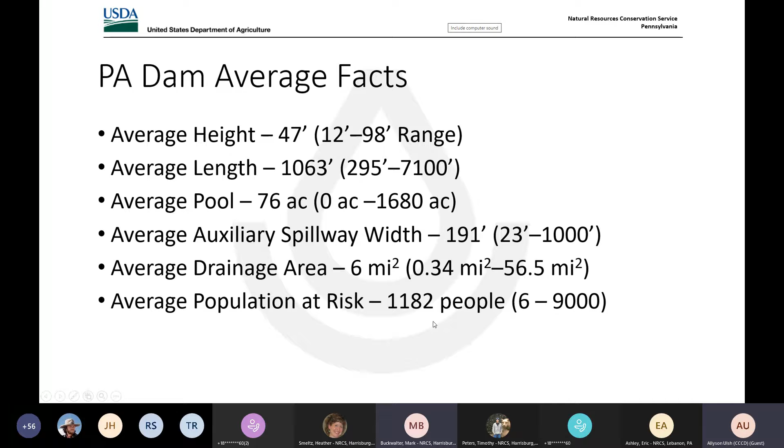Just wanted to pop this slide in here for some facts for dams in Pennsylvania that NRCS was involved with, some average heights. I'm going to read all this off: up to 98 feet high, pool area, about 6 square miles average drainage area, population at risk averaging over 1,000 people. So these are very important dams.

The dams were generally built for up to a 50 to 100-year lifespan. So if we're looking at some of those timeframes I just talked about - and I think, Heather, I pulled this from a slide deck from 2016 - every day these dams are getting older, so some of these percentages might be upped a little bit. But we're looking at some that are over 50 years. So what should we be doing as an agency?

And that's where we're getting into rehabbing and assessing some of these dams. Most of the dams in PA are aging gracefully. So why rehab?

I have a few reasons listed here: deteriorating concrete, some spalling. I know a typical ag project, if you look at our construction specs, the lifespan is noted as 25 years. But some of these harsh conditions on the risers and impact basins - we've seen very good success, but there are some minor issues at spots, some sloughing in the spillways or in the embankments. And then the big one here at the bottom: meeting current state and NRCS safety requirements. They've changed, so we need to assess these dams accordingly.

Here is a map of PA dams. We have some in the design and planning phase, so there'll likely be a lot of construction coming down the road. Like I said, we had an RCC training from Gannett Fleming that was huge, looking at the workload we have down the road.

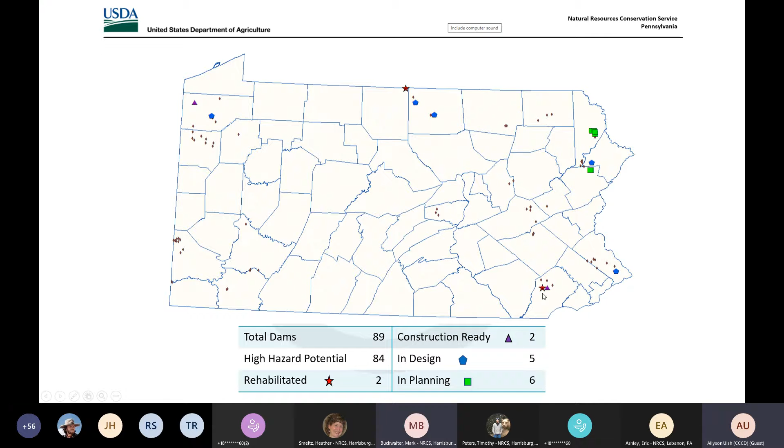Two have been rehabbed up in Potter County, North Fork, and then Hibernia, the one I was involved with, was rehabbed, and now this one here is Beaver Creek, right next to the one I worked on last year.

So talking a little bit about Beaver Creek, it's in the Brandywine watershed in Chester County. It was constructed in 1976, and it's owned by Chester County Water Resources. We partnered with them when it was built, and they still own the dam and were interested in the rehab program.

It was built for flood protection. Height of the dam's 35 feet. The length of the embankment's over 1,300 feet. Drainage area is close to 2,000 acres.

Floodwater capacity is 184 million gallons, and the water surface area was 11 acres that they're going to operate now as a dry dam. This PA 433, that's how we code PA, and then the number is how we code these dams across the state.

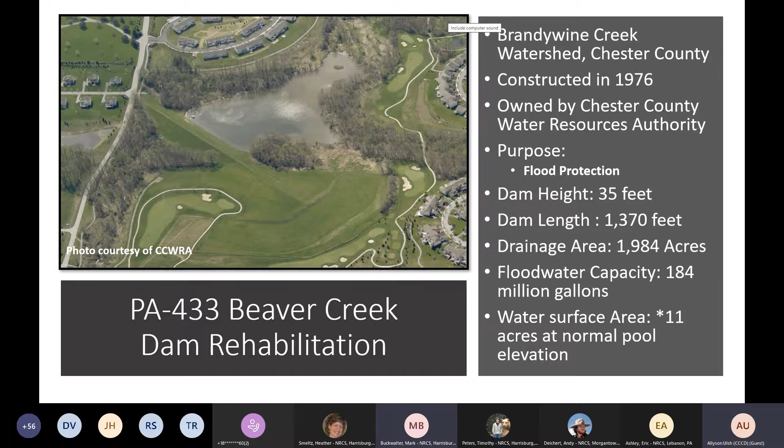The rehab benefits included flood protection, some dam safety elements, water quality, public safety with the pool area being able to make it a dry dam, wetlands benefits being able to dry it up and create naturalized wetland and wildlife habitats, and then just maintenance and safety for workers. I know getting out to that riser they had to take a boat out, so having it as a dry dam would make that a little bit easier.

The dam, once through the rehab, they assessed it again, and it protects over 4,000 residences, 8 schools, 2,500 employees, and the assessed value of all the saved property was over 300 million. So it's a very important dam out there.

The rehab components - the one I'm focusing on here is what we did in the auxiliary spillway. We armored the control section with a roller compacted concrete drop structure. So that's what I'm going to focus on here.

Some of the other elements: they lowered the crest elevation to make it hydraulically flow the design storm flows. We made drainage improvements, put a trench drain in the toe, and part of O&M and assessing these dams and interior piping is getting cameras installed in the pipes to get them viewed. A lot of the toe drain is a 12-inch pipe in the middle of the embankment. Modern cameras can maybe make it through one 90, but there were multiple 90s in this 12-inch pipe, so we did a bunch of cleanouts and access ports to be able to get a camera in and inspect a little bit better.

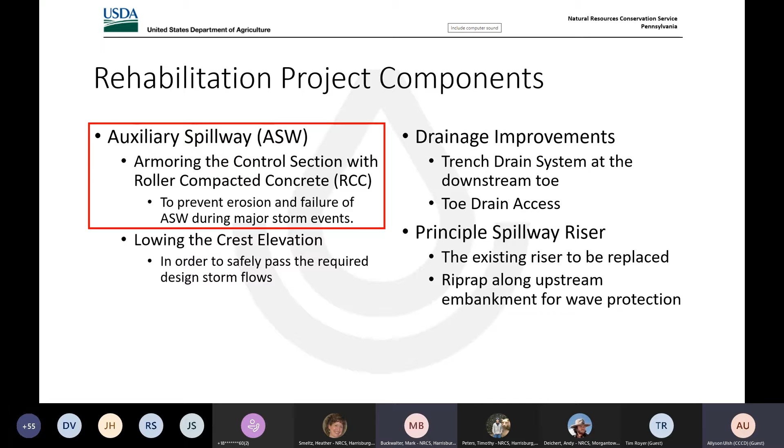A little bit about the job: the contractor selected was KC Construction, and they had a winning bid of 2.24 million. There were some contract modifications and some things we found on site, so that's definitely north of that amount right now. The engineer's estimate was 3.5, 3.6. We had 4 bids, and the next lowest was 4.3.

So we're extremely happy that we had one within our engineer's estimate and what we had budgeted. But you can also see we were very surprised at how low the low bidder was, and there are some reasons for that. The high bidder was 6.3, so I wanted to show some of those figures.

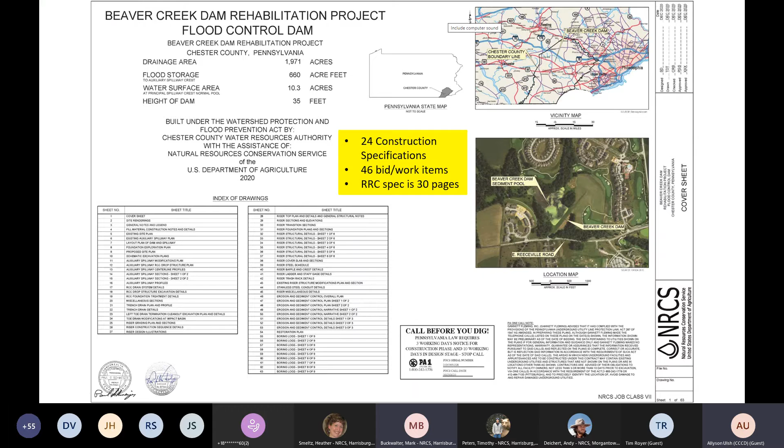Touching a little bit more on the design, there were 24 construction specs, so it was a thick construction spec binder. There are 46 bid work items, and the RCC spec itself was 30 pages. So just a lot to learn and prepare for, and that's not including all the ASTMs and testing procedures to know and understand. Adam can attest to all the studying.

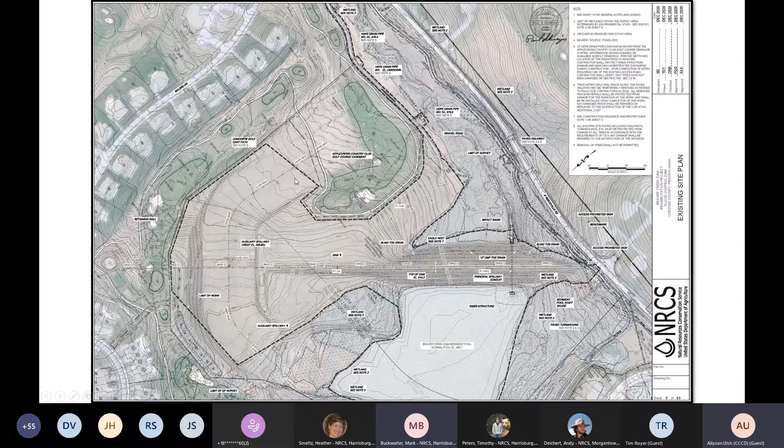Moving along, here's the existing plan view - the crest of the dam, the riser structure, and here's the auxiliary spillway. A little bit more detail: here's where we're going to be doing our work and controlling, and I'll touch on what we're doing and why. Here's the water as it would flow over heavy rain events, flowing through the spillway - you can see the spillway runs right through.

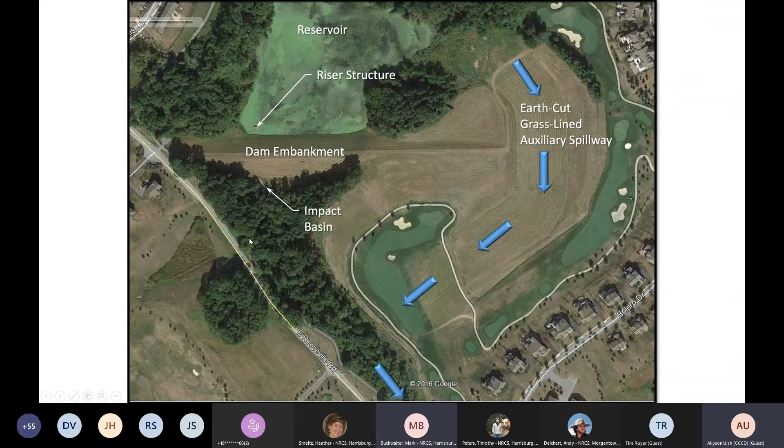I don't know if this is hole number 1, but yeah, and here's homes that had a nice view of the construction.

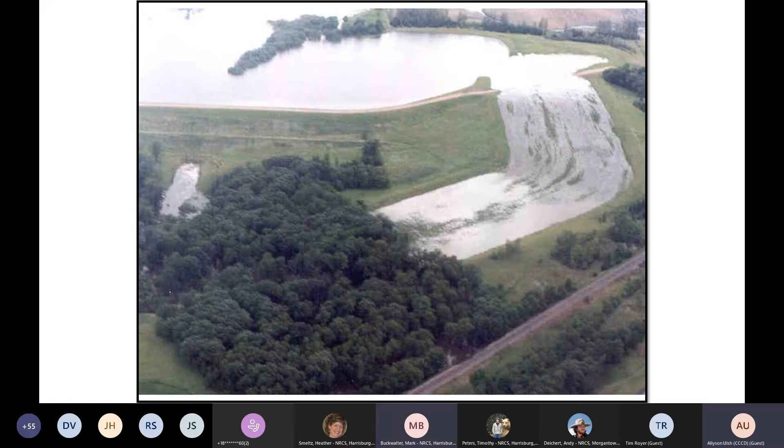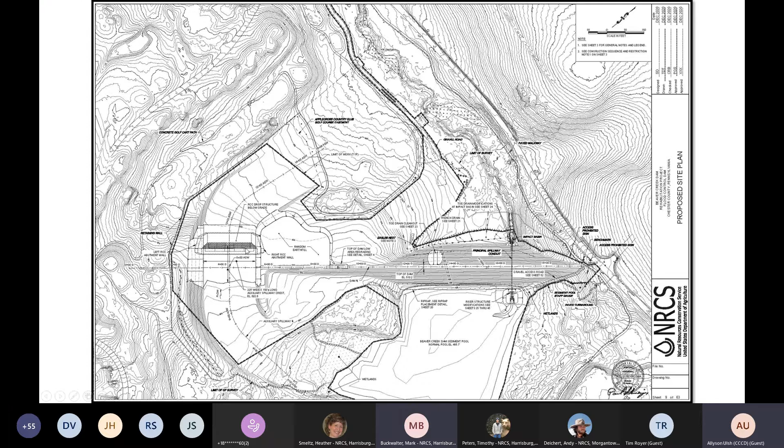So the proposed site plan is to do a drop structure, and they did geotechnical borings to see where bedrock was. What we've done is put in a roller compacted drop structure, which has a control section with a slope down into a stilling basin to dissipate flow. That's the structure we're looking at. Here's some more detail of the steps. We did perforated pipes behind the structure itself to help relieve pressure and equalize water underneath. Here's a concrete cutoff trench that was put in to control flow as well.

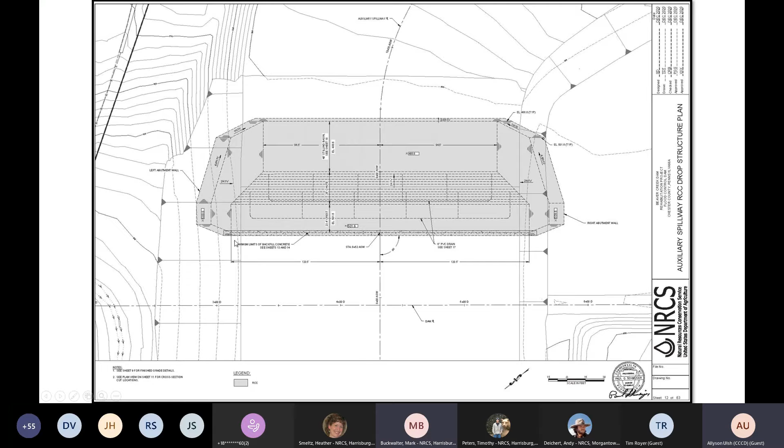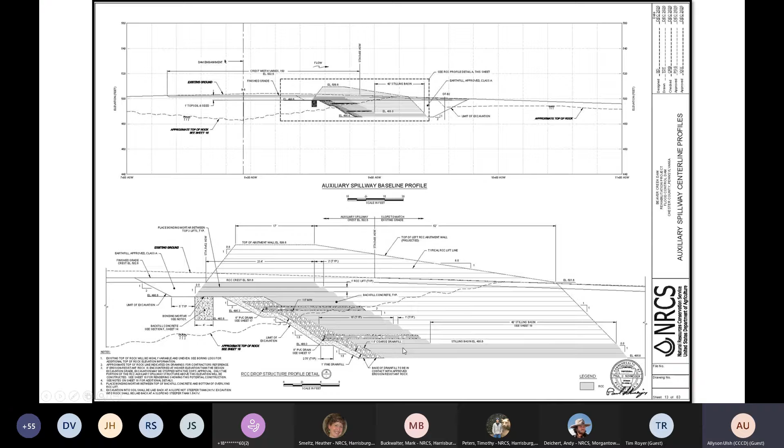Here's a cross section of the area, showing some of the bedrock where it was anticipated to be. Here's showing your 1 foot thick layers of RCC, the drainage pipe through, a sand layer, and then a coarse layer on top of that. Here's showing one of their bore logs. They created a little model here showing how this drop structure would sit in and tie into erosion-resistant rock. Here's some of their corings that they analyzed in the lab to see what kind of flows they can withstand and what would need to be removed.

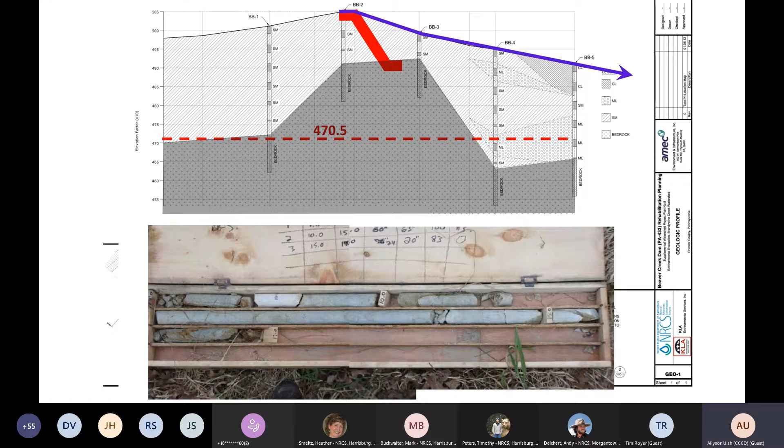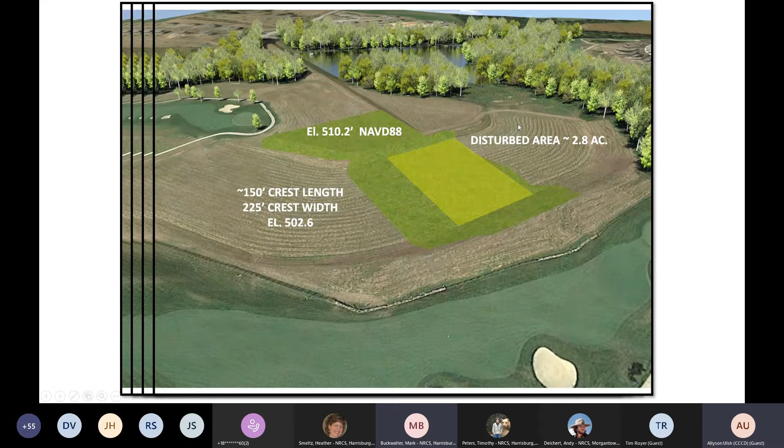Here are nice renderings that Gannett Fleming put together, showing the spillway itself as is, and here's what we're going to be doing. We're going to be excavating into the control section down to competent bedrock and build this structure back in, then cover it back up with topsoil so it's going to look like it's never there. Currently it's been seeded, we're done, it's been backfilled, and that's exactly what it looks like now. They took, I think, close to 2 feet off in the control section to have capacity through here.

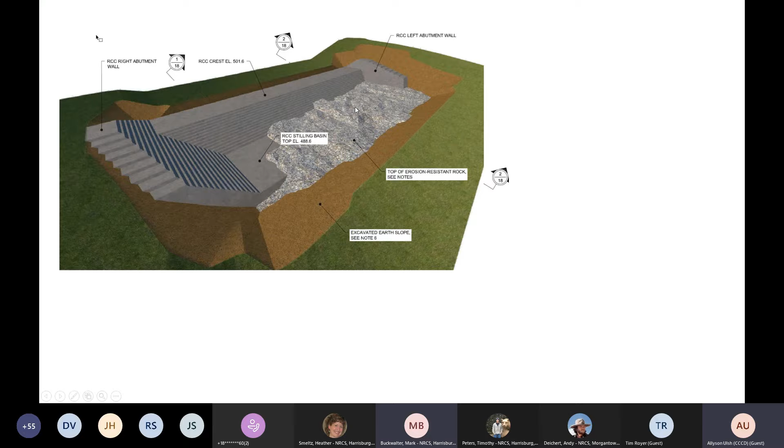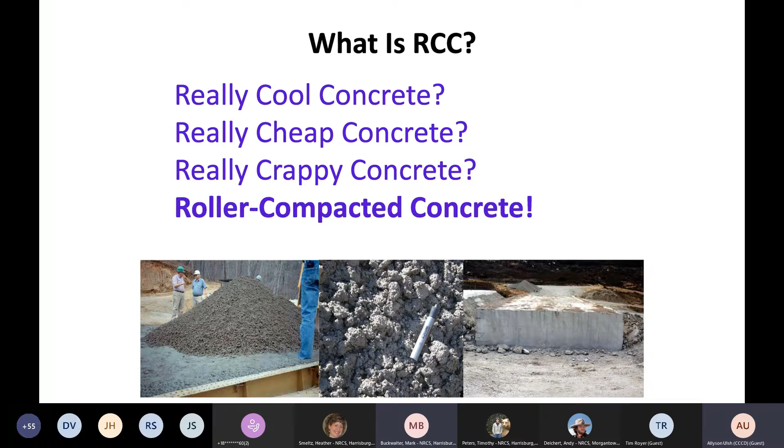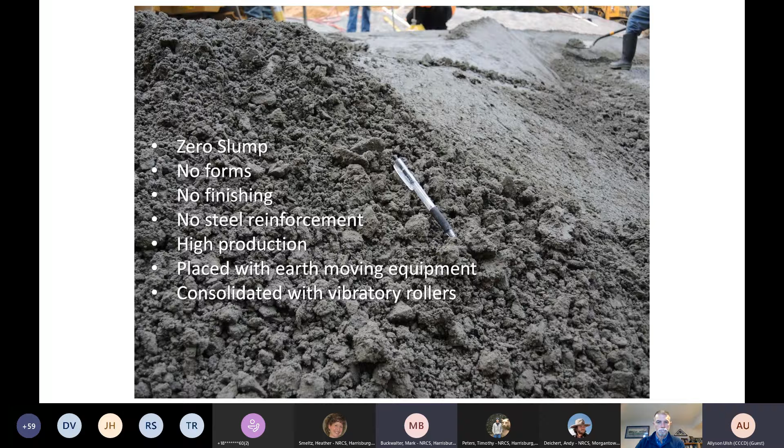I wanted to share a few slides to get into RCC and what it is - I like this slide a lot. What is RCC? Really cool concrete, really cheap concrete, really crappy concrete - that's some things you may have heard, but it's roller compacted concrete, and it's been a massive development in the dam world. Per ACI 116, RCC is concrete compacted by roller compaction, so it's concrete in an unhardened state that will support a roller while being compacted. It has zero slump, no forms, no finishing needed, no steel reinforcement, high production placed with earth moving equipment. I might have to keep moving here, I might slide through these.

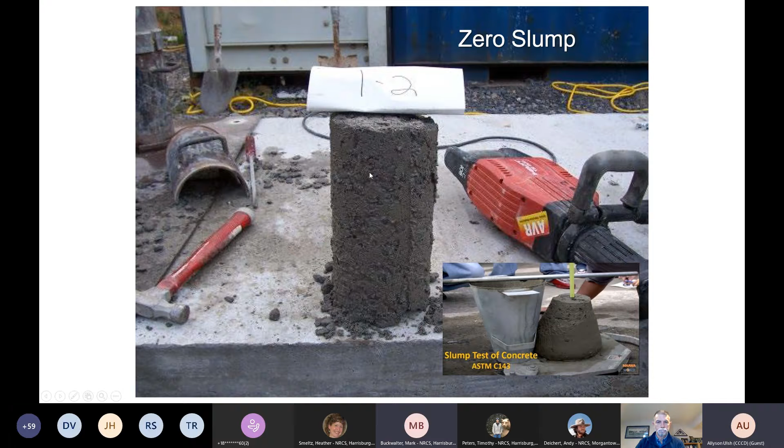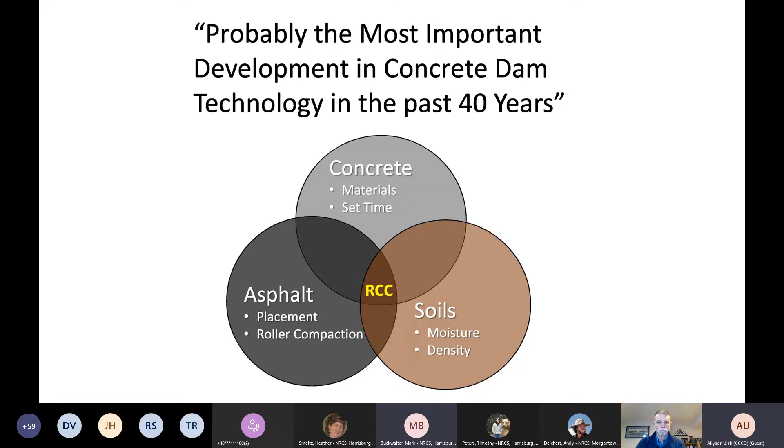Here's showing conventional concrete next to RCC, a picture - you kind of see the difference. You can attempt to form it as best you can, but it doesn't look quite as nice. That's why, pretty often, a lot of these rehabs we are covering with topsoil, which is sacrificial. It will wash away if flow does go through the spillway, and that's a known thing, known by the dam owner, that would have to be put back if it does flow.

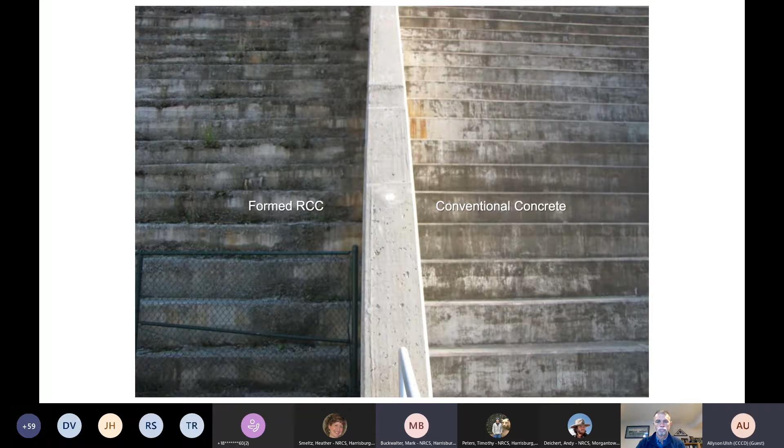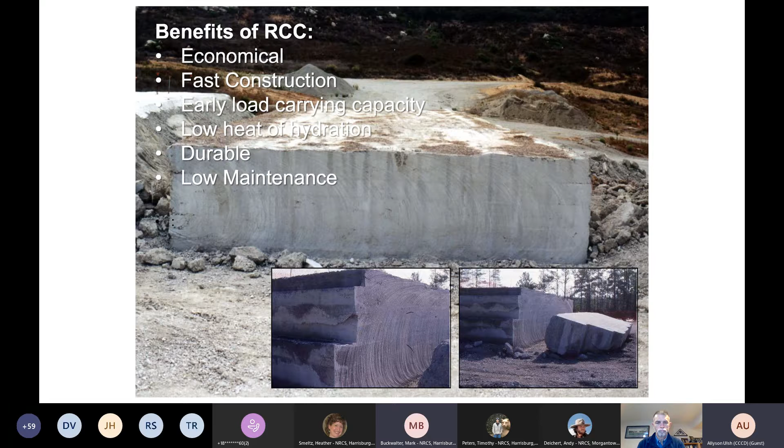The spec for RCC was 3,000 PSI at 28 days, so that's what we required and wanted to see. We were getting cylinder break results at 7 days on the mix they used at over 4,000 pounds average. In my opinion, it looked like they had a lot of cement in this mix.

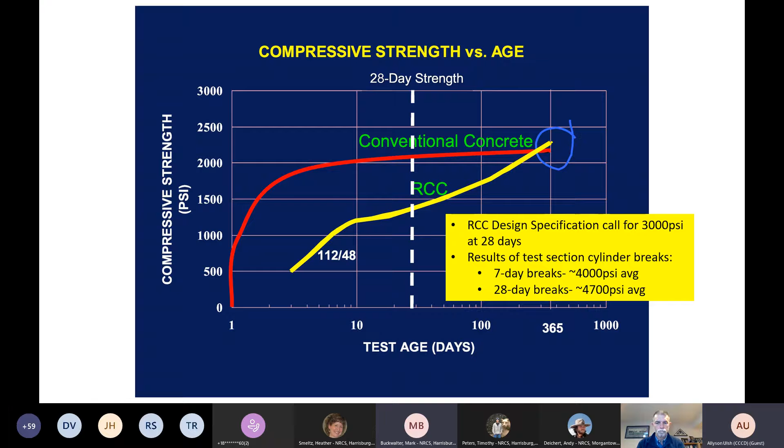It had a lot of early strength as far as these results go. The mix is very typical to your typical RCC or concrete, your Portland cement and water mixtures, so it's very similar to concrete, just different proportions. Coarse aggregate was 57 stone, the fine was concrete sand, and they used a pre-mixed cement slag mix that was 75% cement and 25% slag.

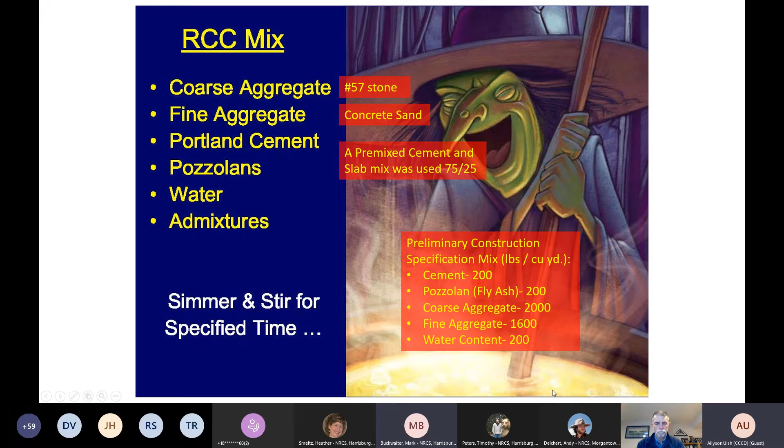These are a preliminary mix we had in our spec of what they typically have in RCC mix. So, jump into the project.

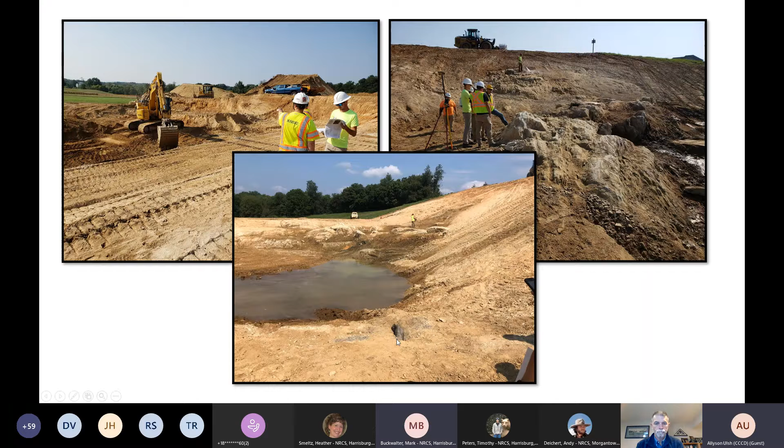This is actually a tile drain that we found. It wasn't in the rehab drawings, but it was in the as-built. But there was lots of seep, lots of water they had to deal with to get pumped out, and that was a significant element to the rehab - a lot of work went into dewatering the site.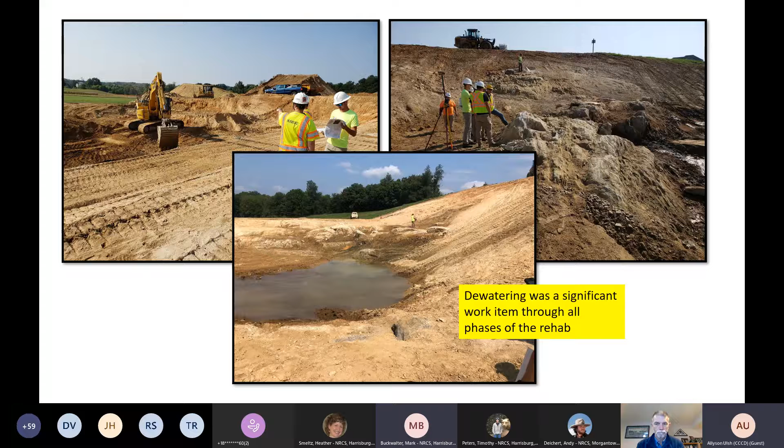Here are some sumps they put in, and continuously, 24 hours a day for 2 months, they had generators and pumps running out there. Here they're digging, and they were doing quality control and getting the survey limits they needed. This is showing some of the water.

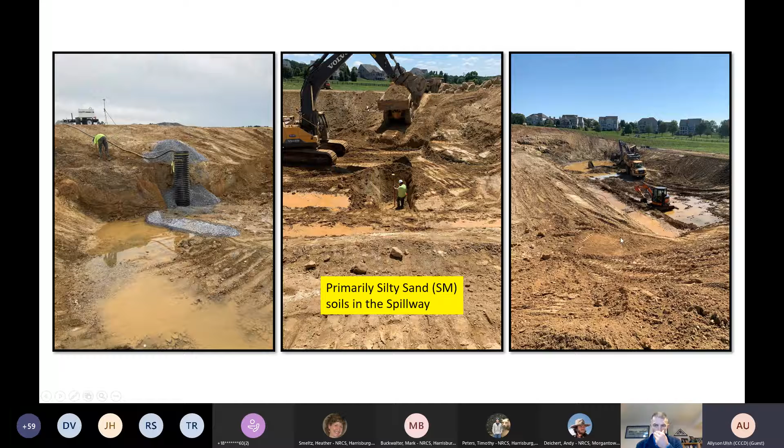Here you can kind of see these banks being shaped as they go. Here's showing about down the grade. I wanted to touch a little bit about this detail.

We weren't completely confident - they did a lot of borings, but we weren't confident exactly where they'd hit bedrock based on a lot of these illustrations. On this right side, we never hit bedrock. We dug a lot further, and the contractor said, how far do you want us to dig? We could just keep digging.

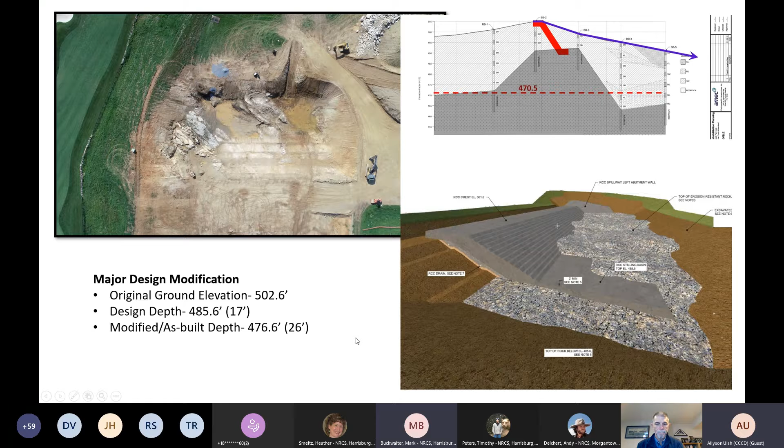We did some analysis to determine how far down we needed to go based on the stream elevation at the outlet - we wanted to be below that. So if this thing did start flowing and eroding back, we'd be at a depth that it wouldn't chew out underneath the RCC. We added about 9 feet of extra excavation, a big modification to that process.

Here's showing the detail of that change. We stepped it down a lot further, thickened the stilling basin, and took it to a lower elevation.

Tropical Storm Ida - it seemed like it was a challenge to get this rock cleaned. It seemed like they'd get it cleaned, and every weekend it would rain, and they'd come in Monday, and the laborers were very distraught to see what they had to come back to and keep doing what they just did. Ida dropped almost 7 inches in 8 hours.

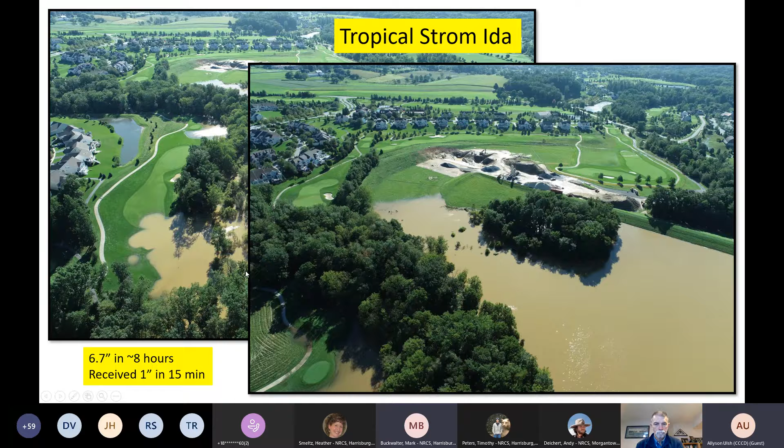In a 15-minute span, it dropped an inch. This is the highest the water ever got at Beaver Creek, and you can see how close it got to the work they were doing.

Keep moving along here, I'm sure I'm probably pushing it already. Here's the tower, here's the batch plant, here's where they mix their RCC.

They had 2 volumetric trucks, 2 silos that held about 50 tons each, and a 50-foot conveyor that would fill these dump trucks with sand and gravel.

They were noting that at peak production, they could do about 120 cubic yards per hour. That's 2 trucks producing 1 cubic yard per minute. So pretty heavy, pretty awesome product, quick production, quick placement. You can imagine doing that much of conventional concrete.

Normal production, I think they ended up working more at this rate, if not less, 80 cubic yards per hour, because there were a lot of components. They were backfilling as they went and doing a lot of other elements as they went.

Here's a quick schematic of these volumetric trucks they would use. This is partially why they were able to bid so much lower.

We specify in the specs a pug mill setup where they'd have their slag or fly ash separate, and they'd mix everything on site. They would have this mixed concrete come in, it would dump in, and then they'd have a truck running for this, which would be the 57 stone and the sand, and they'd be filling this.

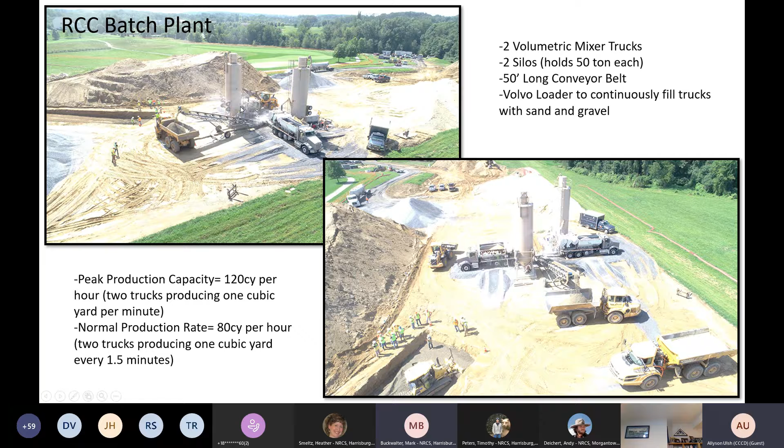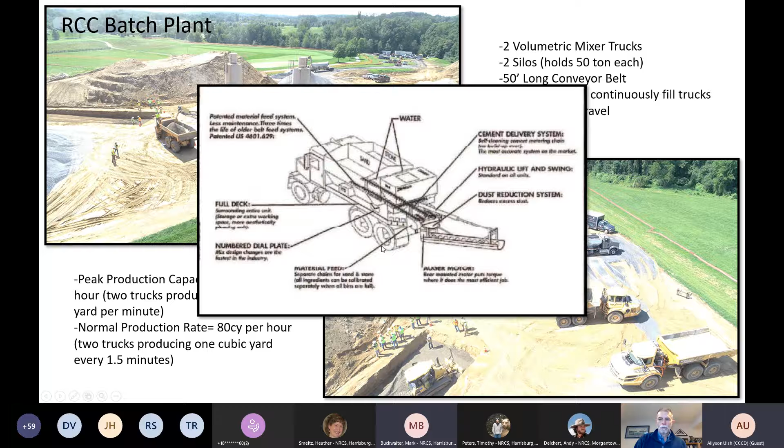They'd have this Volvo loader running nonstop, filling each truck up with sand and gravel, and it would conveyor mix with water. It didn't take much in the trucks where it mixed everything and came out the end, and it was a very well mixed product. I was very impressed. Here's some close-ups of the process.

There was a test section. That was a bid item to do a test section, and here's a cool apparatus specific to RCC. This is a Vebe test. I would consider it similar to a slump test for concrete.

Basically, this would shake it, and they'd have this weighted thing on top, and it would shake it, and then you time it until the paste kind of started easing up, and you could see the paste on top of this little ring. And that gave a good test on where the water content should be.

And here's Gannett. They helped us with the test section to make sure we had the properties we needed to move forward. I mentioned that it has soil characteristics, so when you do soil earth fill, you do compaction density testing. So we use the nuke gauge to run it for this RCC.

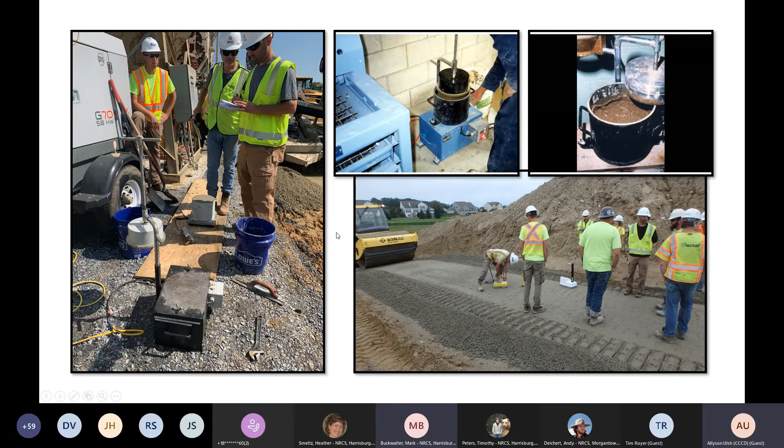Pete, I think you're on the call. This is people might recognize him.

Here's how you do cylinders with RCC. You wouldn't use a rod. You use this called a Hilti hammer with a round plate, and you needed a shell around the plastic cylinder so it wouldn't bust as you compacted it. So you'd still do 3-inch lifts, 3 lifts in this thing.

And here he is, Pete broke our brand new Hilti hammer on the second cylinder. Thanks, Mark. Thanks. Yeah, Pete, of course.

And actually, we had an issue with the first test. It was coming out a lot. The first test section, we actually did 2 days of testing. It was a lot drier, and I think, Pete, that's kind of why we were really pushing in the same concept. You vibrate until you see the paste kind of coming out around this thing, and the paste wasn't really showing it, so we were really pushing and compacting. So I think it's not all your fault, Pete.

Reason for the test section, it's really for the contractor to show means and methods and everyone to get on the same page: how they would place it, how they'll roll it, how many times they need to roll it.

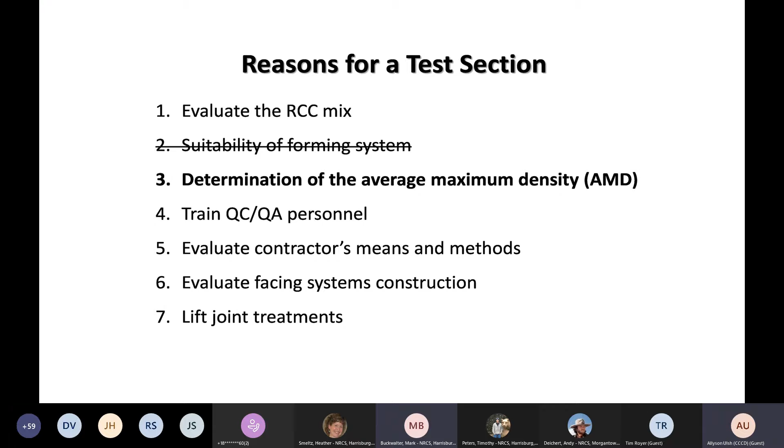I know I'm going quick, but matter of time, I'm just going to keep rolling through here.

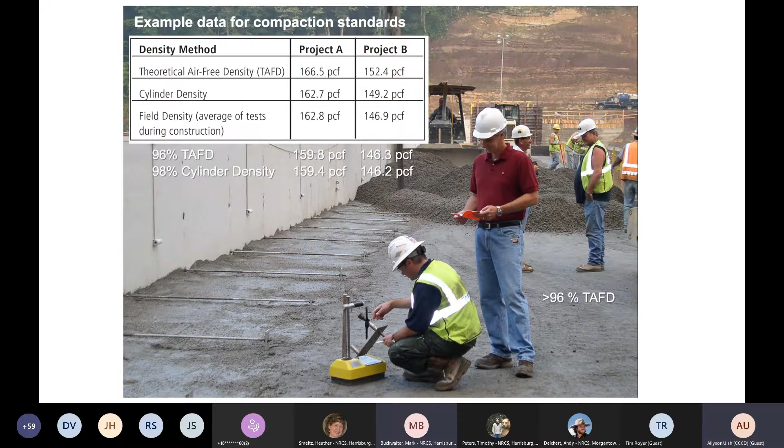So there are parameters to get to for what we needed and what nuke gauge parameters we needed to meet. You had this theoretical air-free density that you need to be 96% of that. So the nuke gauge reading needed to be right around 150 dry density.

And here's a wet density moisture curve that they ran. So they were getting around 5% moisture content, and you could see they would be within the needed parameters with that. You can see optimum's up at 8, but the contractor, that's getting pretty wet.

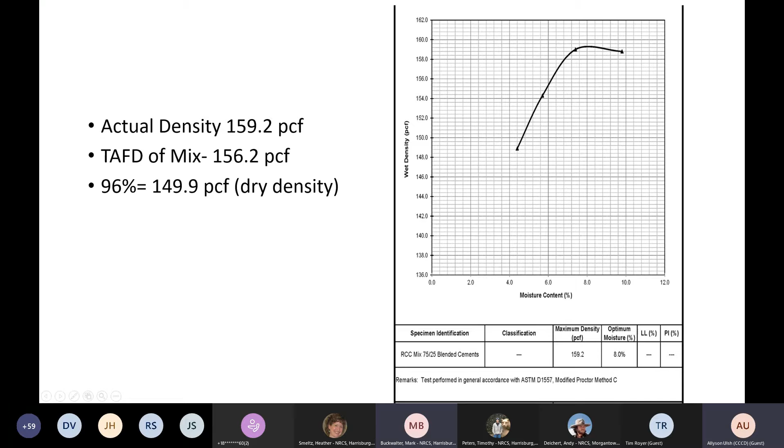They prefer it more on the dry side, more in the 5 to 6%ge, where we could have gotten probably a lot more compaction if they had it a little bit wetter. But we were happy with where they're at with 5 to 6%.

But we were telling them it's temporary, it has to happen. And then before RCC was placed, they used backfill concrete to fill in any of the fractures, any of the voids to get a smooth surface to do the RCC.

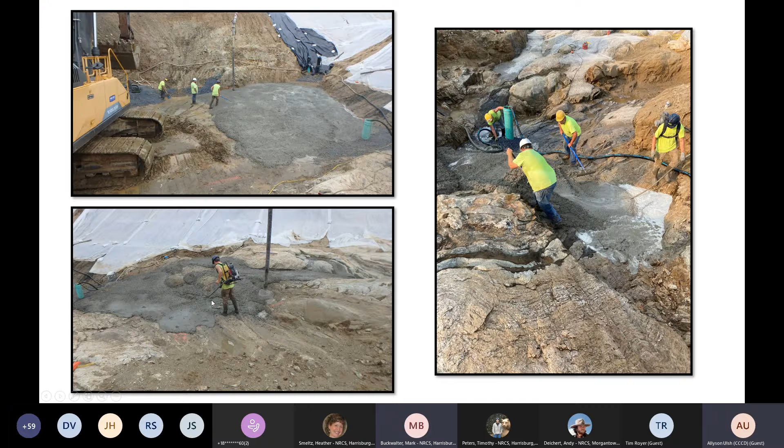So here's the crew doing that, and he was vibrating that a little bit. Nothing was formed, no rebar, just kind of setting themselves up for RCC.

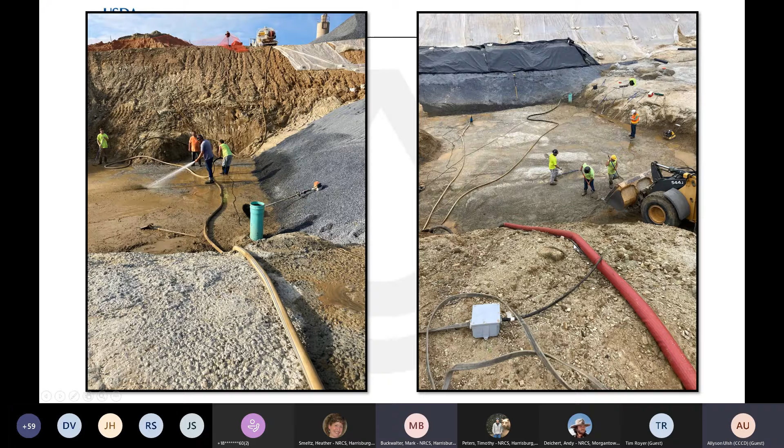Here's right before they started, cleaning mud off, and then a component for RCCs, you always needed a bonding mortar put down on all the rock surfaces, all the backfill concrete. That was basically the RCC mix without the coarse aggregates, without the 57 stones. So that was pretty liquidy, and they'd come down and scoop that out and place that ahead of RCC.

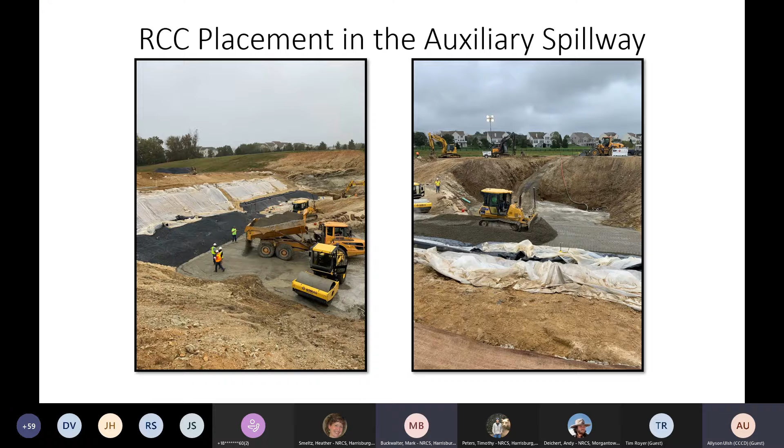Here's production with the dump trucks. Here's pushing it. There were 1-foot lifts. They put it in probably 13 to 14 inches before compacted down to the 12 inches.

Here's a montage of different photos showing the process. The sump pumps, actually, the pipes stayed in. So once they got up to a certain elevation, they just grouted them shut. You can see that there. Some of the testing, some QA, measuring the lift thickness. You can see kind of how consistency it looks like.

We were pertinent to make sure these tracks were not - so anything that was already rolled and compacted, we didn't want the tracks of the roller to go over them, so here they are protecting that.

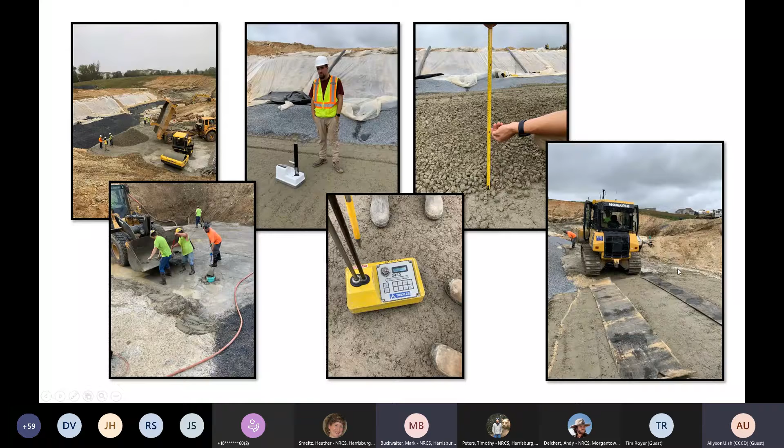Some of the drain pipes early on, they started forming it. I think they stopped doing that, so they did use conventional concrete around the pipes so they had to kind of wait for that to cure till they could get back in and start rolling RCC above it.

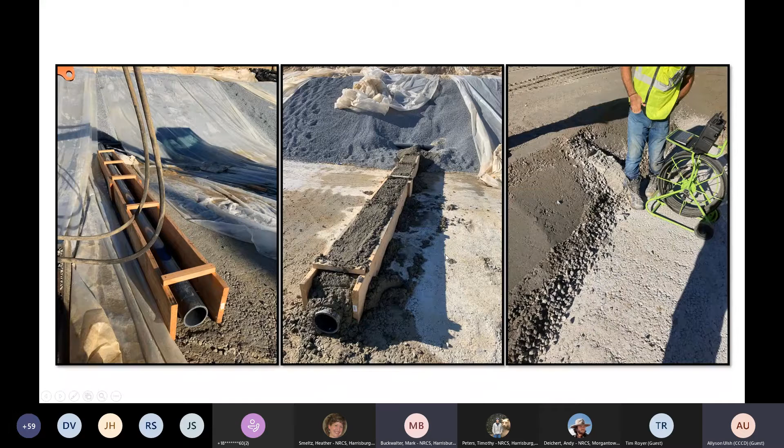Here they're videoing the drain pipe to make sure. We wanted that to be done to show that there were no issues or no collapse of pipe after the fact. Here they are doing earth fill.

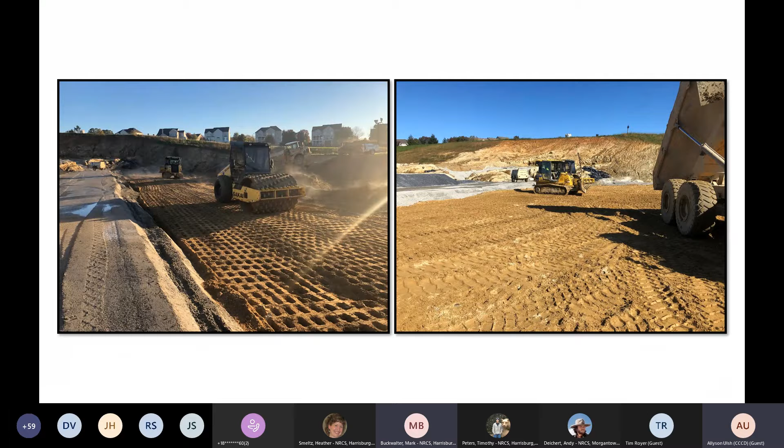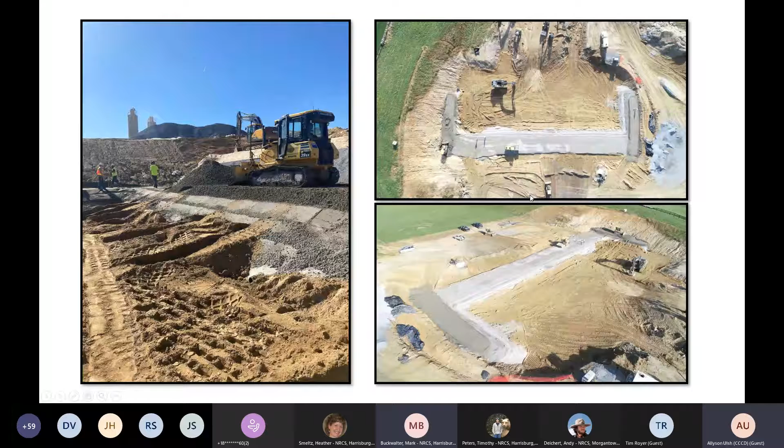As they went here, the picture of the earth fill. Here they are, these lifts coming up. You can start seeing this horseshoe being made. So in hindsight, it would have been nice to see the project done without being earth filled, but it made sense. This enabled them to keep having access to dump more and to keep the project rolling.

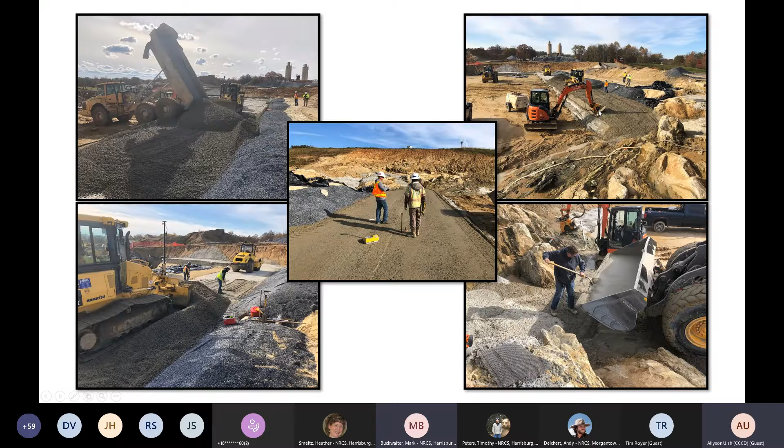Here they are. Here he is facing that slope. They run through with the compaction plate on their Kubota. Here they are with some more bonding mortar. And here we are. This is what it looks like now, backfilled, complete.

Let's see. I'm over time, Heather. I'll wrap it up here quick.

So it took about a month to do. Early on, talks were of this project - it's going to take 2 weeks, no issues, we'll get in and knock this thing out in 2 weeks. The economy really hit hard on this project. They just couldn't get truckers. The product was at the plant, they just couldn't get truckers to deliver it. So they could get so much a week. There's some weeks they got 2 loads, which would fill 1 tower, and they would do bits and pieces at a time. So it got really frustrating.

The economy even affected piping. They had to submit different pipe. Nothing was really getting manufactured, everything was delayed. Here's a breakdown on quantities: about 4,500 cubic yards of RCC was placed, 300 yards of backfill concrete, coarse and fine, about over 22,000 cubic yards of excavation from the spillway, and then the earth fill that went back in.

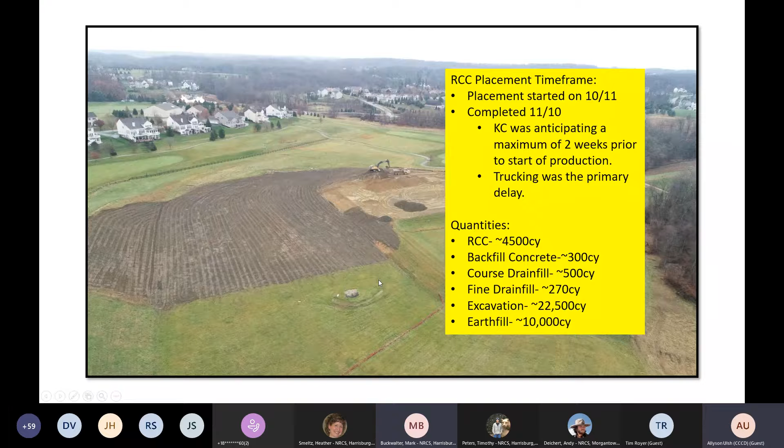Lesson learned for me, that's the title of the talk. Man, everything in the world is new to me, but RCC was eye-opening and there was a lot to learn, a lot to study. The spec was very specific.

The economy was a huge impact, like I said. The dewatering was intensive, it took a lot of time to do. The rock surface preparation was a huge process and very demoralizing, I'm sure, for the laborers and crew to have it buttoned up on a Friday, think they're going forward, and come out and have to do a lot of things again. The big element was a bald eagle was in this tree, right smack dab in the middle, and that limited our construction window from August to December 31st. So really they have two weeks now to get all the big equipment work done.

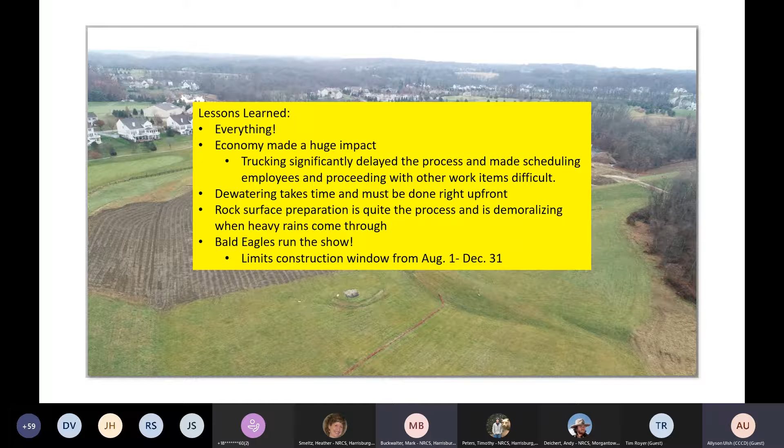And so that's what I had. Heather or Adam, you can chime in.

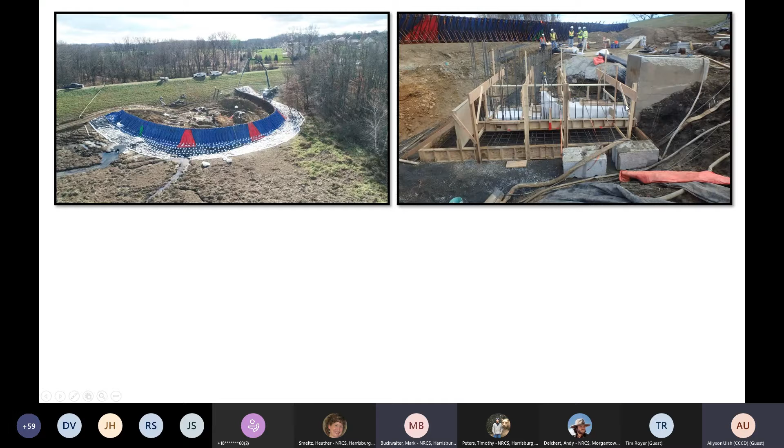This is actually pictures of the riser work that's happening as we speak. They had a coffer dam up to divert any higher flows. I'm not sure the coffer dam was really needed — I don't know that we had any storms since it's been in that were too significant, but the water is being diverted. Here's the base of the riser. Here's a foam transition, which was pretty unique that they put in. And this is where we're at now — they're actually going to pour the lid tomorrow. But here's this riser structure going along.

It's cold weather, but we've had some decent stretches. I feel like they've poured when there were good curing windows. So yeah, questions, comments? Adam, Heather, any comments to add?

The only thing I can say, Mark, is that you gave a really nice presentation. If it sparked anyone's interest, we should have another one coming under construction this year, probably the one after that, and one a year at least for the next couple of years. So we're always looking for inspection, we're looking for engineering support on them. It can be a good experience, and these are really good projects.

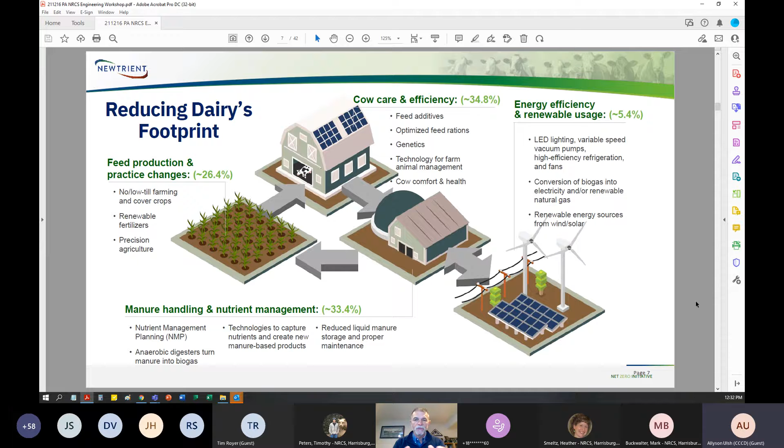In a dairy, almost everything comes in at the consistency of the sludge that you create in a wastewater treatment plant. So I always tell people that we are like the back end of a wastewater treatment plant, because we don't have to deal with as much water, but we have to deal with a lot more concentrated product.

So as we look at the opportunities, one of the big opportunities right now is biogas production and renewable energy production. I want to share some of the reasons for that and how some of those markets have developed and what's going on in them, so that we can have conversations around the important issues as you're communicating to farms and farmers, so you can help them understand if they're asking you questions.

I want to preface this with, I'm not trying to make you an expert, and I understand you're going to get questions, but I'm happy to take questions from dairy producers. So if you ever have an opportunity where somebody's saying, hey, have you heard anything about this, feel free to send them my way, because they really are the people that fund Newtrient. I work for the dairy producers, and I'm happy to work with producers of any size, really anywhere in the United States, to have conversations around what they can do, what kind of conversations they should have, and really where their opportunities are.

So as we talk about biogas, the U.S. dairy industry is a powerful environmental solution. We can provide solutions, reduce our own emissions, but also help offset other emissions. As we look at the environmental benefits of dairy, we see real opportunities, and if there are sustainable long-term markets, there are ways to pay for those benefits that actually help society reduce the overall greenhouse gas footprint.

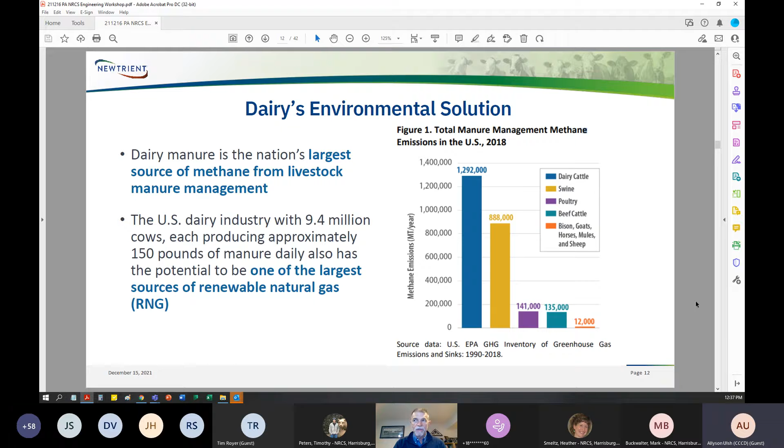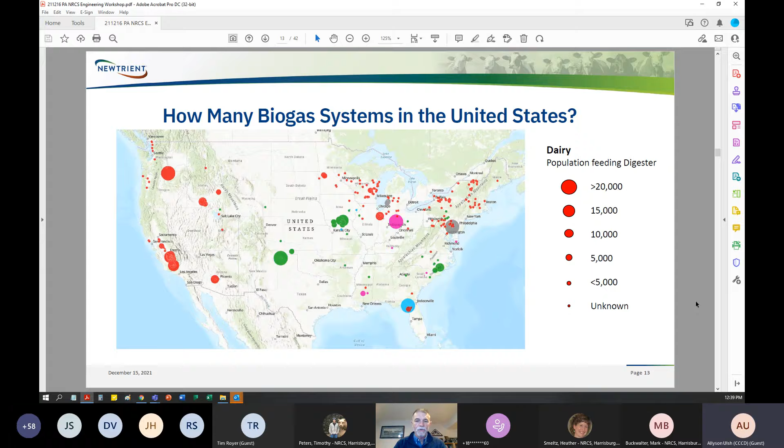Interestingly enough, there's a bunch of really small ones up in Vermont, because that's where the best market is for renewable electricity. They have a program called the Cow Power Program that sells electricity from small dairy digesters at about 22 cents a kilowatt hour, and the bigger ones at 18 cents a kilowatt hour. That becomes a market that supports those generation projects up in Vermont. So on a per capita, or per cow number basis, Vermont probably still leads the United States in the percentage of digesters per number of cows.

A really interesting thing that showed up - and this is just a logic exercise because it's not practical to do right now, it's not affordable - is that if you could take every dairy with more than 50 cows, and capture all of that through anaerobic digestion and convert it to energy, both renewable electricity and renewable natural gas, the dairy industry could produce enough renewable natural gas to supply 100% of the processors' needs and 80% of the electricity. With a little bit of food waste added in, we could probably take care of the transportation sector and the retail portion as well.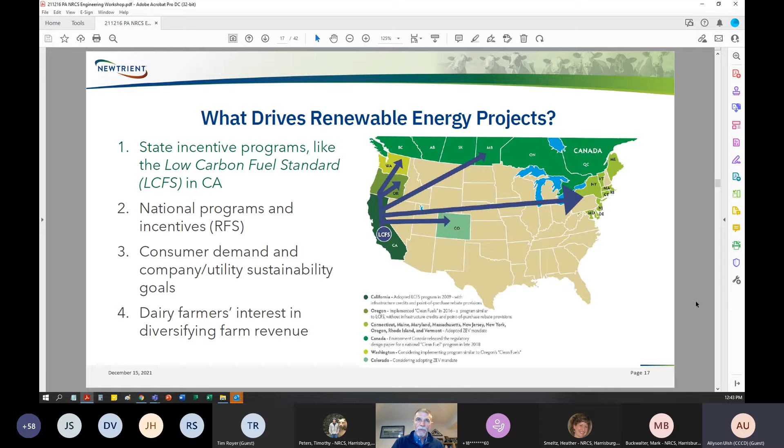As we go on, another thing is that there are a lot of companies, both in the dairy supply chain and outside of it, that are setting aggressive carbon reduction goals. Many companies, for instance those in the EU, are being driven by requirements in their country, but some are simply driven by their investors. So we see a dramatic increase in companies looking for renewable energy or renewable credits, carbon reductions they can tie to their supply chain. That's one of the things dairy is trying to offer its customers now.

Now, one of the things that's somewhat difficult is customers coming in saying, well, we want our milk to be low carbon. But if the milk is low carbon, that means we can't sell the carbon credits, because when you sell a carbon credit, you're sending the credit for being low carbon to whoever you sell it to. If those customers in the supply chain aren't willing to buy those credits, there's no way to support these projects. So right now we're in a bit of a dilemma: if we want to support projects that are good from an environmental standpoint, we often have to go outside the supply chain to realize the revenue that supports them. That's something the industry is working with right now, and something we're really trying to come to grips with and make people aware of.

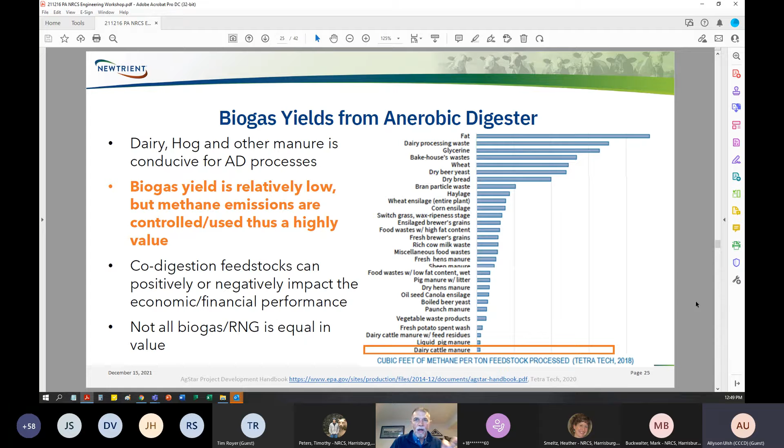And that other opportunity is the reduction of the methane from the lagoon, and also the offsetting of the transportation fuel. And this is where the carbon intensity score and the low carbon fuels standard comes in.

This is a California incentive program that produces a credit. The credit is based on what they call a carbon intensity score. And so it is looking at how much you reduce the greenhouse gas impact on the environment as a whole project. And in the lower left-hand corner of the slide that's on your screen, you can see a conceptualized CI calculation. And I say conceptualized because this is at such a high level that it's almost useless for anything but a way to wrap your head around how the calculation works, because it's multiple pages of data that have to be analyzed to get you to a CI score.

But essentially what it does is it looks at a farm where a project's going to be put, or any project for that matter, and it says, what are the current emissions from everything involved in that operation that will now have a renewable energy project? And then from that, it says, what emissions are we going to eliminate? So what emissions from the farm are going to go away? And so from that baseline that's 0, for example, reducing farm emissions is going to be a negative number.

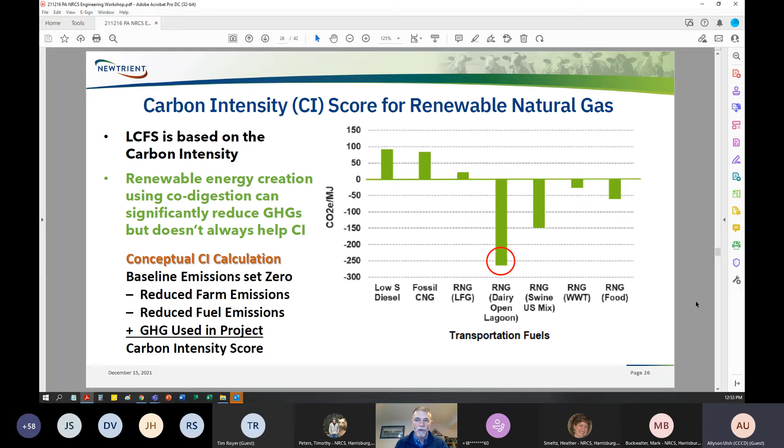If there were a way to get a solar heating system to produce the heat for the digester, that would be another reduction. So there's all these different opportunities and all these different companies looking for ways to lower the CI score and therefore increase the value of the renewable natural gas.

So what does that mean? What does that mean to a project? Well, natural gas is sold by 1 million BTUs. 1 million BTUs is a standard unit, sometimes called a decatherm, a standard unit of sale. And I based all of these numbers on Monday's markets.

Right now, if you have a renewable natural gas project at that minus 250 CI score, you could sell your gas for about $89.79 per million BTUs. The base gas price, what you would pay for a 3-year contract for base gas right now on the CME, is about $3.50, $3.59, which means the base gas only represents about 4% of the price you get for the RNG.

It also means the gas is being sold at almost 25 times the value of the base gas. And the value is about 44% from the national program, the D3 RIN value, which is about $39.35, and 52% by the low carbon fuel standard credit, that's the $46.85. Again, that D3 RIN is from a cellulosic feedstock, and that LCFS credit is based on that minus 250 score.

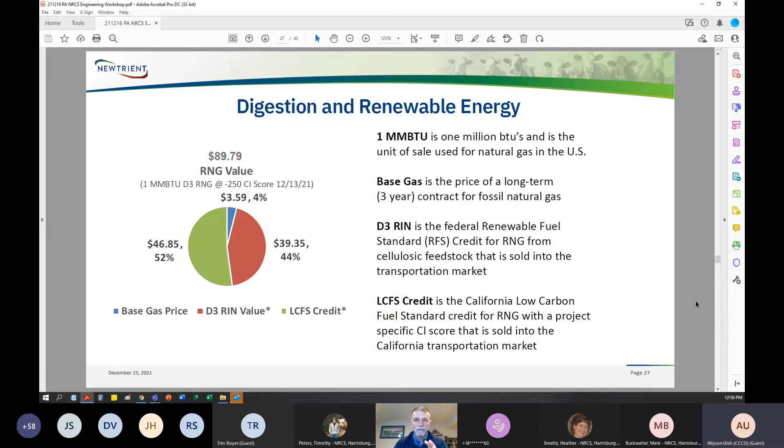But this is a big reason why there is so much interest in the dairy industry. And the next slide I'm going to show you is kind of where the opportunity is, and this is what I try to really talk to dairy producers about and help them understand: number one, that they're already spending money on their manure, and they need to understand what that money is.

Before they get involved in a project, you've got to know where you're at, because one of the things you're going to have to do as part of negotiating or considering putting in a project yourself is to consider, what's it going to do to my manure cost? Is it going to make it go up? Is it going to make it go down? What benefits am I going to get? What costs am I going to incur?

Right now, looking at costs in 2019, if you were in that same typical Midwestern dairy, scraping to a lagoon, having it filled where you're emptying it a couple times a year, a well-run operation is going to be somewhere between 50 cents and $1 per hundredweight, or right in the neighborhood of $200 per cow per year.

Now, if you're working with a digester company, I think it's reasonable to say if you're going to benefit from that manure, from me collecting it and delivering it to you, and then taking care of it after you're done with it, you should at least share in some of that cost. So from a negotiating standpoint, knowing this number gives you an opportunity as a producer to go to a developer and say, here are what my costs are to move manure now. And you want me to change that system, maybe make it less efficient, and you want to profit from this, so I think you need to help me cover some of this cost as a base.

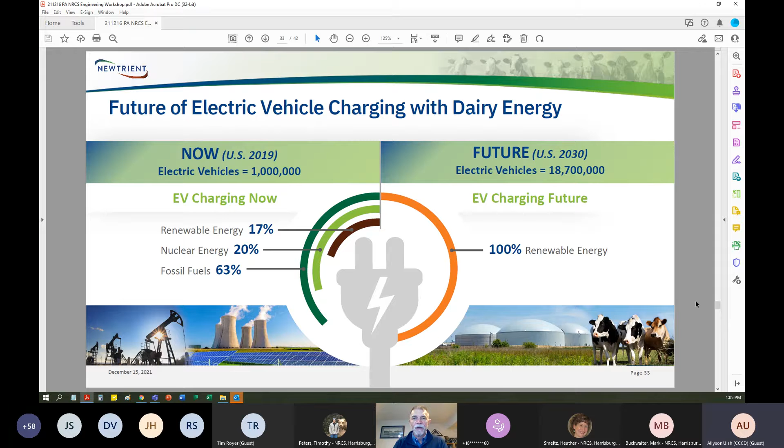This has been part of the legislation since it was passed 14 years ago, and 7 years ago the EPA did some information outreach and rulemaking outreach to talk about how to get it in place. But even though we know there have been about 40 projects submitted to EPA, at this point none of them have been approved. So there isn't an opportunity for people to really realize that, and we're not able to see zero emission vehicles because the emissions are just moved to the power plant. So from the dairy industry standpoint, we're trying to actively engage and activate this renewable electrical pathway through the renewable fuel standard.

We are actually making some headway in Congress and other areas in helping people understand that this is an opportunity that needs to be incentivized — incentivized with those type of voluntary markets that have driven the price of wind and solar down so much — to let us have an opportunity to be as competitive as they are.

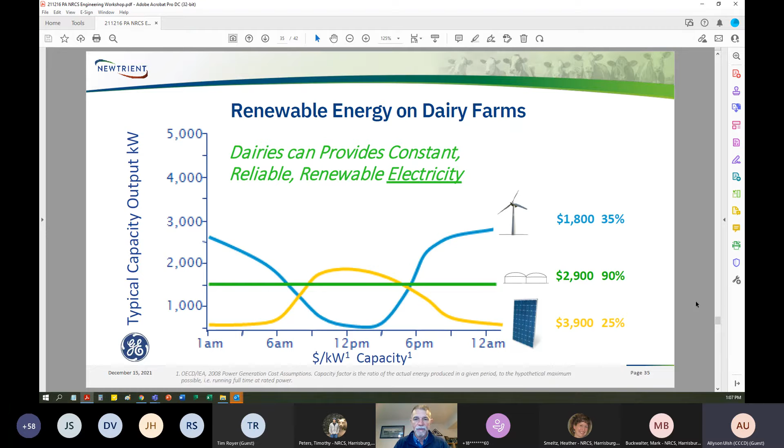The last area I'd like to talk about is just a little bit about these future opportunities in ecosystem services. Dairy has some tremendous environmental assets. They have the ability to stack a lot of credits. We have a lot of different places that we can address things. There are a couple of different types of markets: voluntary markets that are just driven by environmental goals of companies, and regulatory compliance markets that are driven by somebody being regulated. The RFS is a regulatory compliance market because the fuel industry is obligated to buy these credits. So those compliance markets are out there.

But one of the things we're really seeing in the carbon world is a development of opportunities for carbon credits for regenerative and sustainable agriculture. One of the difficulties is the protocols and the programs are not fully developed, and they're really not completely in place. And you don't know what you don't know, and you don't know what the market's going to look like.

And so what we've been encouraging people to do when it comes to these other markets is just tread lightly when it comes to those areas. Don't sign up for a 30-year contract on a soil credit when 3 years from now there may be a completely different crediting program. Use real caution when evaluating the solutions and really think about the impacts it's going to have on your operation.

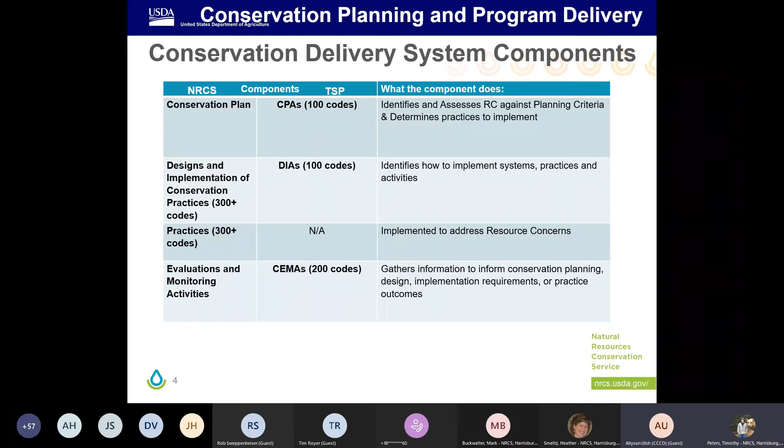This is a slide from the national presentation that really confused me the first time I saw it. The point is that there are multiple paths to our end goal. For example, TSPs could do the CPA, then the TSP could also do the DIA, and a TSP or another qualified individual could complete the CEMA. A similar path would be for NRCS to develop the conservation plan and the engineering I&E, then NRCS could verify that I&E and move the project forward, working with the landowner to make a decision, and also play a role in developing evaluation or monitoring requirements.

What the national slide likes to show is that this path could change. NRCS could do an I&E, and then the TSP could do the DIA to verify it and move it forward, or the reverse: TSP could do the CPA, and NRCS could move that I&E forward, confirm with the landowner, lock them into a decision, and progress further. What I found confusing about this slide is that it's missing the engineering steps - it doesn't show where site-specific engineering designs and construction would fall. That would happen somewhere after the DIA, in this range right here, and we'll talk about that more.

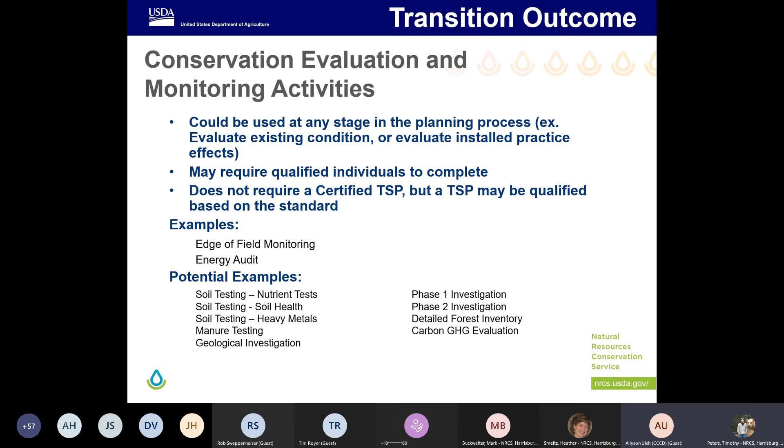Like I said, each document has specific criteria, and each document contains deliverables for the TSP or qualified individual to provide as part of that DIA, CPA, or CEMA. Now, one thing that has to happen, and it's specific in each document, is that copies must be provided to the producer, to the NRCS field office, and then also uploaded to the NRCS registry. So that, I think that's a little bit of a change. That is a requirement.

Now, I'm not going to spend too much time on this, but as for how these different items can be contracted, there's multiple options. CPAs, DIAs, and CEMAs can all be contracted separately, or they could all be contracted together. Now, it's my opinion that I think we are going to encourage CPAs and DIAs to be contracted together very regularly, very commonly. We'll see how that plays out, but I personally believe that the CPAs and DIAs will work best if they are contracted together and provided by the same TSP around the same time.

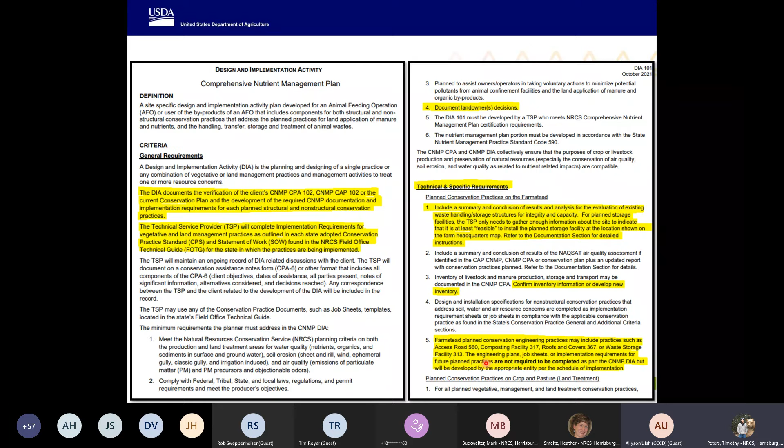Just so you know I'm not lying about this, the last highlighted section states that for future planned engineering practices, site-specific designs are not required to be completed as part of the 101. They say it once again: engineering plans, job sheets, or implementation requirements for future plan practices are not required to be completed as part of the DIA.

Deliverables: similar to the CPA 102, correspondence with the landowner must be documented and provided as part of the submitted DIA. If changes aren't needed from the 102 after reviewing and verifying with the landowner, the same maps and drawings can be used for this 101. If changes are needed, maybe landowner situations or site conditions have changed, then the maps and drawings need to be updated as part of this DIA 101.

Continuing on with deliverables: evaluation of existing structures for integrity and feasibility must happen. We must look at the existing structures and determine if they can be used. We need to gather as much information as needed to determine if the planned storages are feasible.

This is the big thing that I see impacting engineering as part of the DIA. The TSP must include at least one soil test pit for storages. Test pits must be to a depth of at least 2 feet below the anticipated bottom of subgrade for storages, and 3 feet below if that storage is going to be in a karst or highly fractured bedrock location. We also want the soil from the test pit identified using the Unified Soil Classification System. The soil test pits have to be located.

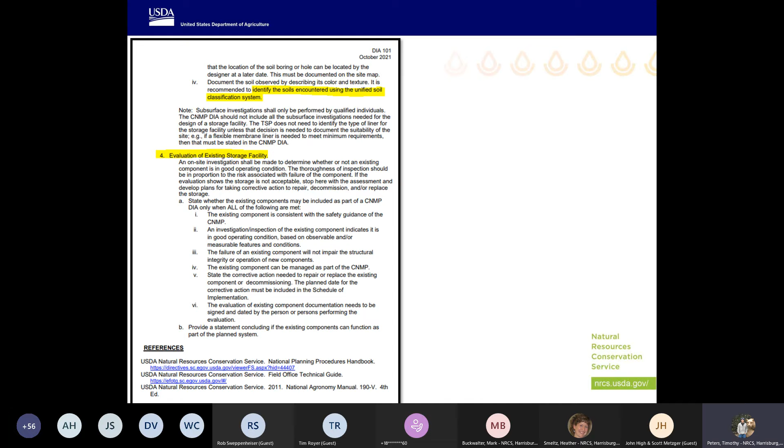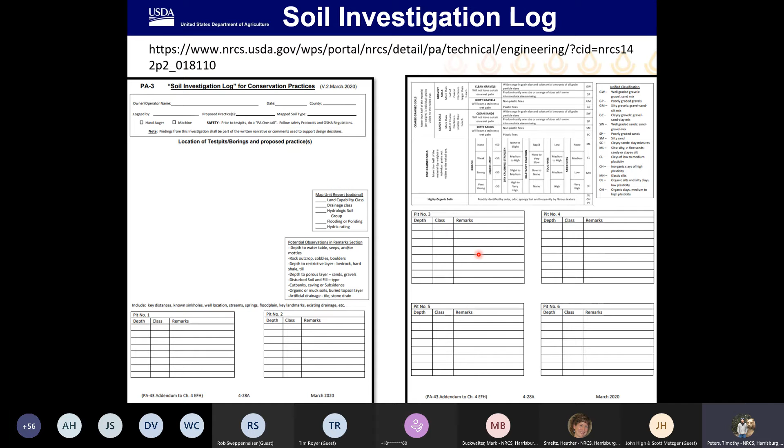The log has a section for a site sketch. It lists some things to think about as you're doing those test pits and the environment you encounter or where it's at. It gives some guidance on classifying the soils you encounter with the USCS system, and we have 6 separate tables where different test pits could be logged. This isn't something Pennsylvania requires for our engineering soil test pits, but it is a tool you can use if you choose to.

As I mentioned before, the CEMA document will list the qualifications required to complete it, and you don't have to be a TSP. TSPs could complete CEMAs if they meet the requirements, but you don't have to be a certified TSP.

The second CEMA that could involve engineering is CEMA 228, the Agricultural Energy Assessment. This is our previous CAP 128 plan, our Ag Energy Management Plan. So that is now a CEMA, and it's CEMA 228.